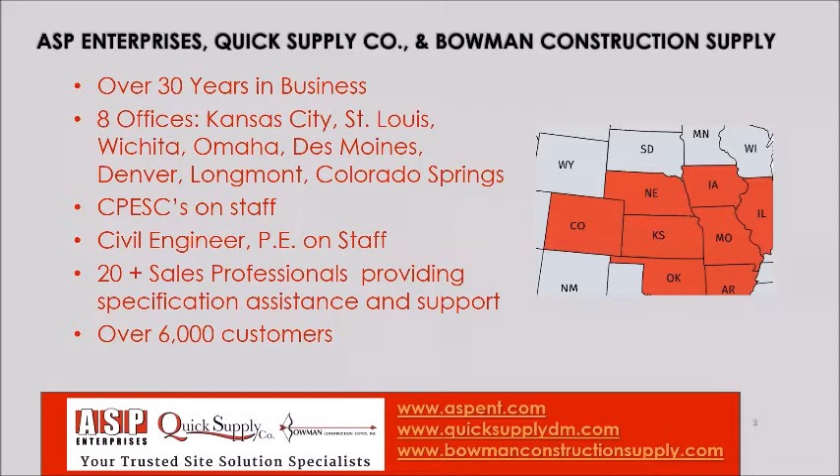And well over 6,000 customers in the region, so we've been around a while. Many of you are familiar with us. Those website links you'll see again - those are great technical resources for you. And probably the most important thing I want to impress upon you is that you can specify with confidence that we have the servicing ability to take care of those projects.

And again, the website - we have some of the best brands in our industry, and all those brands are represented with both specification sheets and installation guides. So our website can be a huge resource for you. They're also mobile friendly, so wanted to make sure we get that out of the way.

Four years before the 2017 card, the 2013 card was issued. And I don't like to read to people. If you can see on your screen, you'll be able to read these different categories that ASCE measures our infrastructure. There's 16 different groups that get letter grades, and those are just used as indications to try to identify priorities and to find out where we have the areas of greatest need.

Anything I show on here is not an indictment of civil engineers or anybody else in the construction industry. It's just to identify the problem and then figure out the solution.

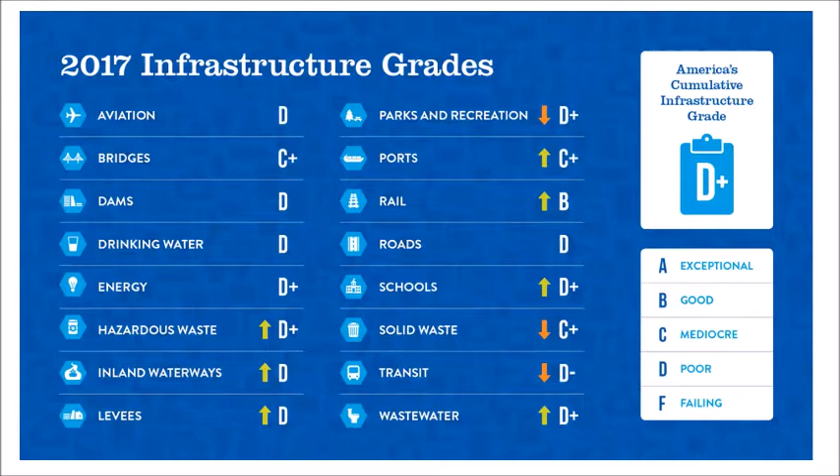One of the things we've learned with this report card is they continue to compare results from one report to the next to see if things are getting better. You'll see no arrow in front of roads. That means the letter grade didn't change from 2013 to 2017. Didn't go up, didn't go down. A D is still a D.

And that's not an indictment of us. It's not a criticism of us in the profession. It's just a fact that many, many Americans drive cars every day, and we all know that. So our existing infrastructure is aging, and ongoing repairs just can't keep up with demand yet.

Now, with something like what we're experiencing now, there's a lot fewer cars on the road, but this is temporary. We all know what it's going to look like when we get the all clear and this thing clears up. There's going to be a lot of people back on the road, and we hope to come see you all again. But in order to get ahead of this challenge we have to get that letter grade up, we're going to have to really identify what types of things we can do better.

And that's what we're doing now, is sharing information, sharing knowledge. When we do a full hour just on roads, with a room full of engineers or contractors or government agency folks, we can get specific about what cracking is, or which failures you're seeing in your area, whether it be cracking, rutting, or raveling.

The fact is, we all see some version of these in one place or another. Certain regions, based on climate, soil conditions, traffic patterns, and just old practices of design and construction of roadways, see some of the cracking more than others.

In the old days of asphalt, flexible pavement, rutting was a real problem, due to warmer temperatures and soft mixes. So to compensate for that, the industry overcompensated and went to much stiffer mixes. So rather than rutting being the leading problem in a lot of areas, cracking became the problem as the pendulum swung towards stiffer mixes. So asphalt binder is being asked to do more than it can really do.

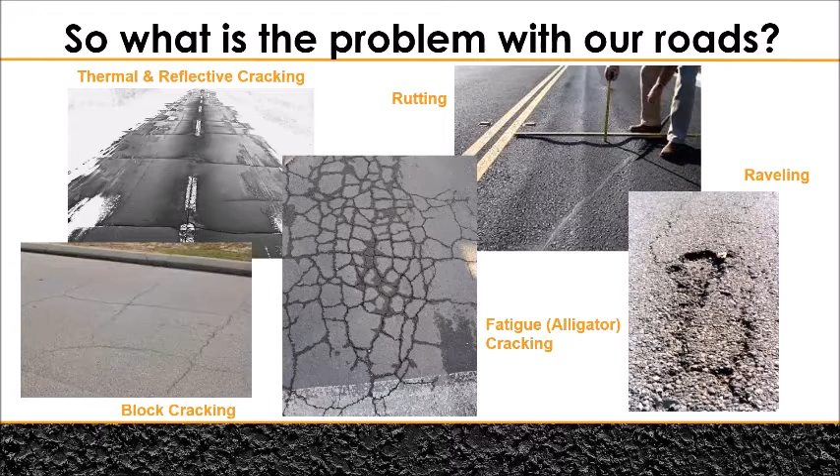It's being asked to prevent rutting and prevent cracking all at the same time. And what we've seen is no matter how good the design is, or how good the mix is, or how good the base is, eventually all roads are going to crack.

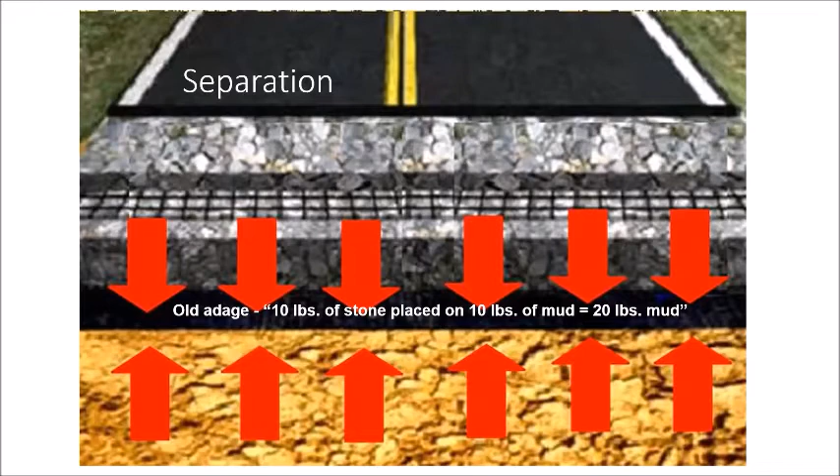There's another graphic I just popped up to overlay this one on purpose, to not totally cover it. But what happened when TenCate came out with this miracle solution, as they called it, the RS580i, is it was able to provide the strength they needed from geogrids, plus the separation that geogrids alone cannot provide. And why does that matter? We're going to get into that in a little bit.

One of the things our supplier, TenCate Mirafi, talks about with their RSI series is that you can reduce the amount of rock you need for your rock base. That is true. The other option is to go ahead and use the rock base you were going to use, but now that you've added the RSI, you get a lot more strength and a lot more life out of that pavement, going towards perpetual pavement.

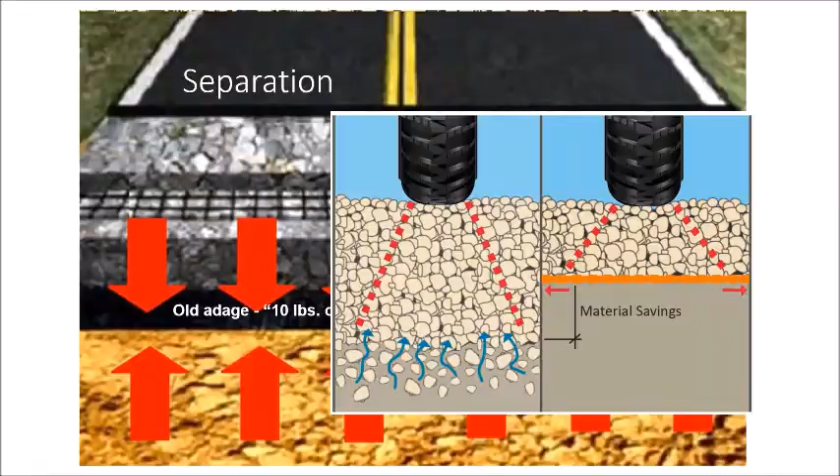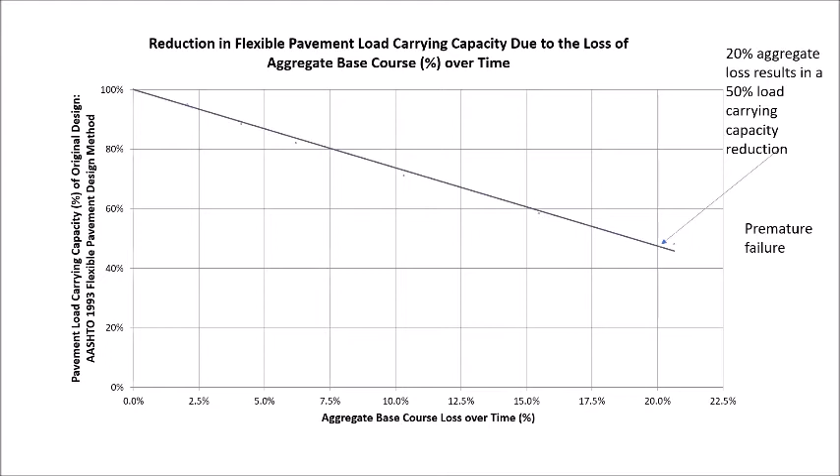I can give you all the research that shows that just losing 20% of your aggregate, which is the mud coming up into the rock or the rock going down into the mud, can cause you to lose 50% of your strength, or load carrying capacity. Think about that for a minute. 20% could be just a few inches depending on the thickness of your rock base, and now you've lost 50% of the strength that's supposed to support that road. You're going to get premature failure.

RSI brags about 5 different categories for their product: higher modulus, higher strength, higher water flow filtration, better confinement similar to what geogrids do, and better separation, which we just talked about.

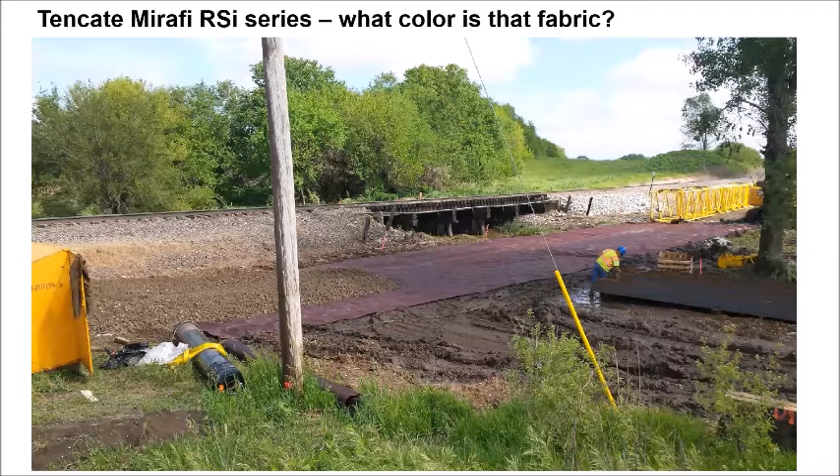If a specifier calls out an RSI product on their plans, they want to defend their spec. They want to make sure if they drive by, they see the right product on the ground. If it's a black geotextile fabric, all those other geotextile fabrics look the same - you really can't tell the difference. So you want to be careful to defend your spec because all geotextiles are not created equal. They perform differently, they have different characteristics, and we're going to get into that in this next slide.

This is just a real simple graphic. There's a lot of other products that were tested by independent labs. This one happens to be in Louisiana. A lot of testing was done in Alaska. There's been a number of universities that have tested these products and compared them with each other in scientific tests, so they came up with scientific data.

And in this, it's showing the pre-rut deformation. That is when the base doesn't rebound and keeps a permanent deformation in the base, and that's going to expect the pavement to carry that load. Flexible pavements aren't going to carry that load - they're going to follow the base. So GeoGrid can provide good confinement and reinforcement, but it can't provide that separation.

So what tends to happen with a GeoGrid alone is you can get contamination of the aggregate base with the soil fines. So eventually you start to accumulate deformation in the base. This says 15 millimeters - that's going to be over a half an inch. That's going to end up being cracking in the flexible pavement above it in asphalt.

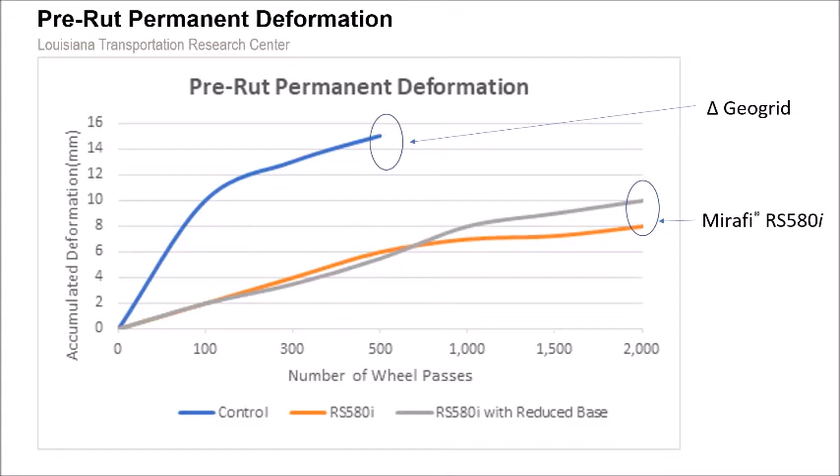Mirafi RS580i shows half of the deformation under the same number of wheel passes, and it continues to get stronger quicker. That's a stress-strain relationship, meaning it doesn't have to stretch before it gets strong, not like the other products on the market. So the Mirafi RSi series is definitely different than everything else.

This happens to be a really cool picture that maybe was photoshopped a little bit to show how orange it is. But we've had highway projects and railway projects that have used huge quantities of RSI, and the specifier can drive by, see the orange, and make sure that they're putting down the geotextile they've specified.

Now, I'm talking about adding the strength and longevity and keeping that aggregate clean as you do with RSI. It leads us to the biggest problem that engineers and anybody has with roadways. And just like real estate, you're supposed to ask people what are the 3 biggest concerns with pavement: drainage, drainage, drainage. Now, RSI is strong and it's great for soft soils, but it alone isn't a drainage solution by itself.

And drainage matters because you're going to get potholes, you're going to have hydroplaning cars - it's a safety issue. And it really does show up with somebody who has old tires, like my kids. They live on a gravel road and they drive old cars. Safety is an issue. Mirafi used their RSi product, which is super strong.

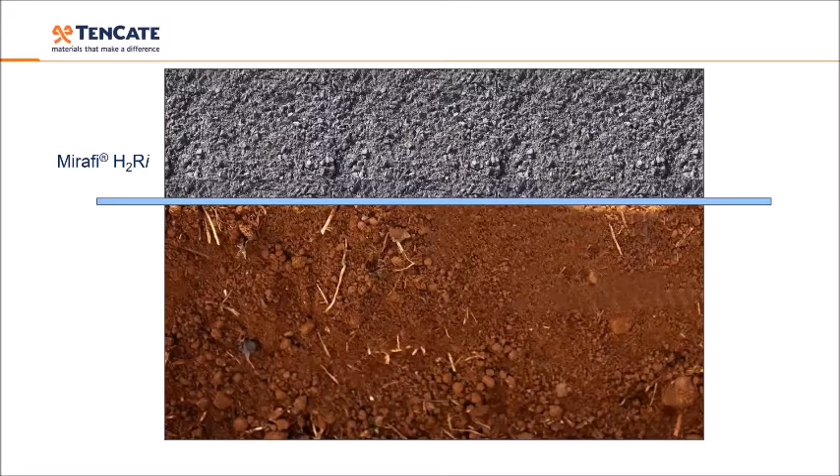This product here creates a capillary break and a drainage layer. So any of the excess moisture in the base is going to come up and hit the Mirafi H2Ri, which is, like I said, as strong as RSI, but it has these little channels in there that actually wick away moisture, similar to an active fitness shirt.

I can't say brand names.

What that does is it works like a siphon, rather than work like a drainage layer that operates only due to gravity, which would be out of luck if there was no slope or fall, or out of luck if there was a wrinkle or a fold in that rolled product. H2RI can go up and over any wrinkle or fold or deformation in the base.

The plan view of this, which I should include and I took it out, shows this as a hump up and over. The way I narrate it is I grew up in southern Iowa, a poor kid living in the country, and we used to siphon gas out of old trucks and tractors to put into a dirt bike. Once you suck on the hose and get that gas started, it just continues to flow into your container below. I hate to encourage you to siphon gas, especially in tough economic times.

Gas is cheap, so don't do it. I'm just saying this works like a siphon, and this is fantastic because in the past, this was a concern that all designers had. If they had a drainage layer, they had to make sure it was installed perfectly — there can't be any wrinkles or folds, or it wouldn't drain.

This is a graphic that just shows the comparison of different products and how they work in draining the soil, and increase in undrained shear strength of fine grained soils. Well, the difference here is the percentage of the moisture content. On the far left is this red line, which should be blue — I'll edit this graphic someday. It shows H2RI and what happened to the moisture content compared to some of the other drainage composites and other products that were intended to solve wet soils.

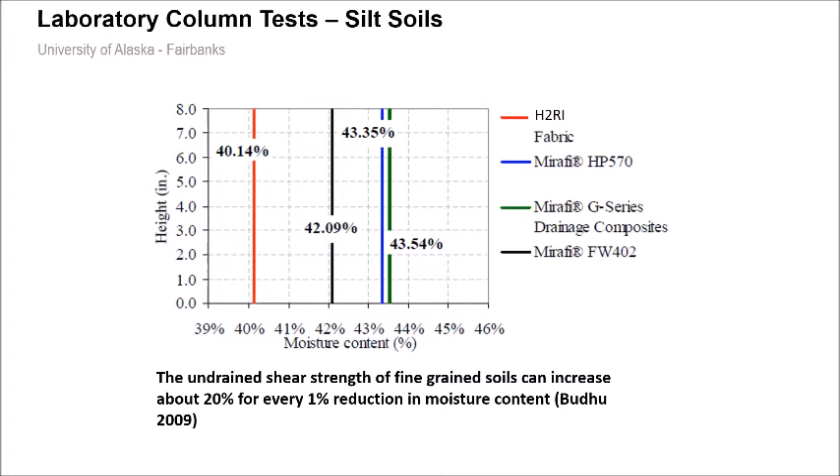This is a significant increase in optimizing the moisture content. There's a lot of research that says the reason that matters is for every 1% reduction in moisture content, you gain 20% of the strength of that soil. Or the other way of saying it, for every 1% that you optimize the moisture content, you effectively increase the soil strength. Now we're creating a stronger base.

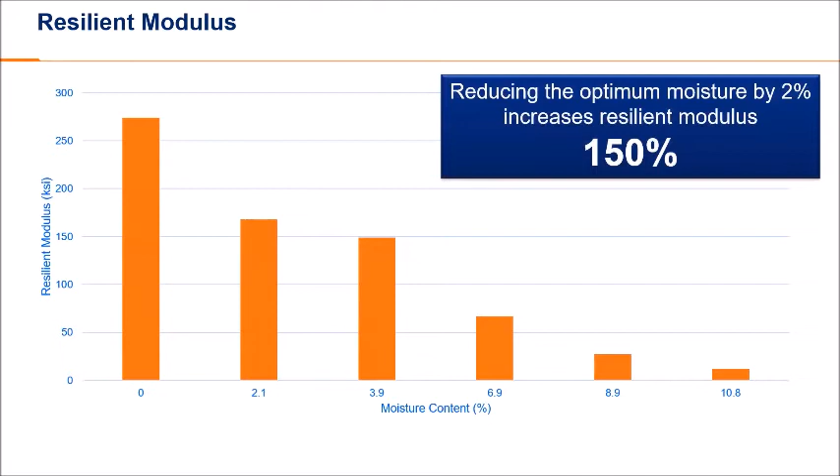The research shows that just by changing it by 2%, you can increase the resilient modulus, which is going to make your road stronger and last longer, by 150%. So a little bit of investment up front in putting down a better base now can lead to a much better road section. This is like building a cake — everything sits on top of the sub base, then the base, then the pavement. So another way to say it is if you reduce the optimum moisture by 2%, it decreases the pavement deformation by more than 50%.

There's already, MoDOT has used it on some bridge approaches. A lot of organizations that we deal with on a regular basis have already started using it for their wettest areas. They might use RSI on the rest of the roadway, but on a really wet section, they could use H2RI.

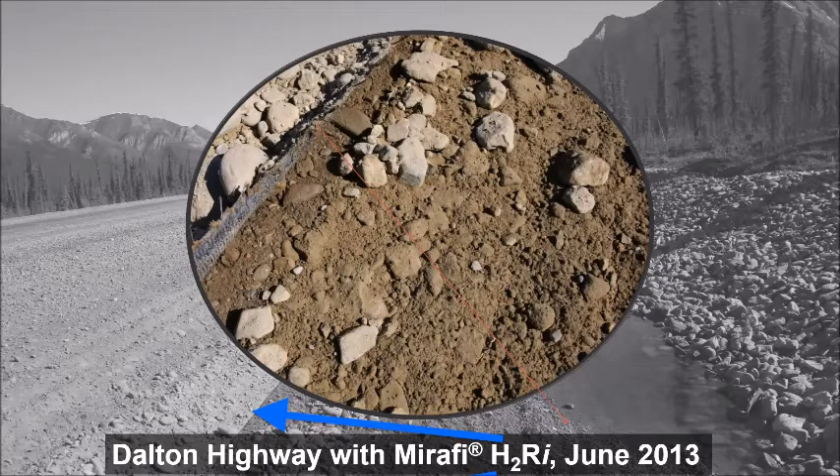I've talked to a friend of mine who works for a big engineering firm here that does a lot of design for the DOT, and he would talk about rolling that down to a lateral drainage tile. Instead of exposing it, have a lateral drainage tile running the length of the roadway. That's another option.

So if we've improved our base and made it last longer, and achieved what we want to call perpetual aggregate base, now if we're going to do the next layer in the cake, we're going to have to go with the pavement above it.

Before I hand this over, I want to reiterate something. There's only so much budget to fix these roads. This isn't an indictment on any of us that we're getting a D on our roads. The fact is we have to take that limited budget and figure out how to spend it.

In a perfect world, we would entirely replace a road, and the best way to solve drainage would be to get down there and regrade the ditches, put in new culverts that are properly sized, use only good material for the sub base, then build up a really good aggregate base, and then put on the best pavement.

Fact is, a lot of communities are faced with having to do just an overlay. And sometimes they roll the dice and do an overlay on a road section that maybe needed to be replaced more than just an overlay, and they just bought themselves some time. The next solution we're going to talk about is going to touch on that a little bit.

But I really want you to know there's a happy medium somewhere in there. You can leave the base, the sub base in place. You can get down and replace part of your aggregate base. And if you use a product like RSI or H2RI, you can get longer life out of that. So a small investment up front can give you a significant increase in the life of that pavement at the end.

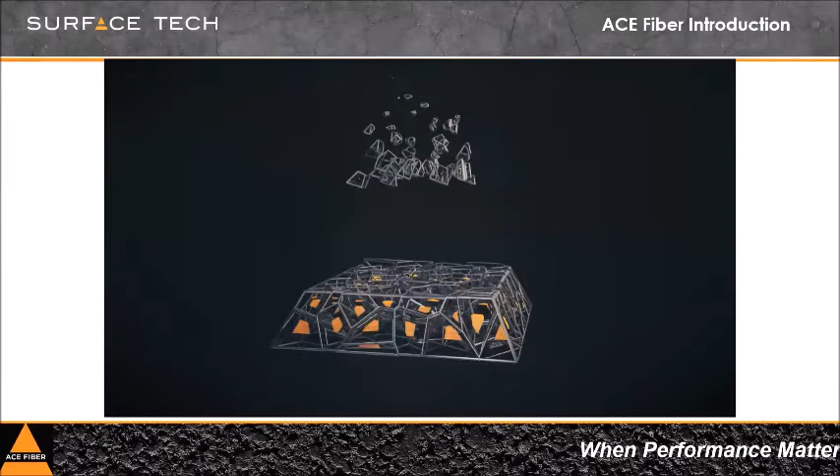Well, a great video, so my part is over.

So let's get into the ACE Fiber part. For those of you not familiar with ACE Fiber, it's a mixture of 2.1 ounces of fiber and 2.1 ounces of wax. We have bundles that are 3/4 inch and 1.5 inches long. You get approximately 10,000 fibers per bundle and about 19 million fibers per ton of asphalt. You can see in the center picture the coated fiber. At 170 degrees it starts to melt, and at 190 it's totally soluble in the mix.

Now, sasobit has been used for years in warm mix. There's not enough sasobit wax to actually change the mix design. You don't have to change any of the binder. So it's a nice chemical, a nice compound to be able to add into the mix, but you're not adding any chemicals or plastics that could do any harm to the mix.

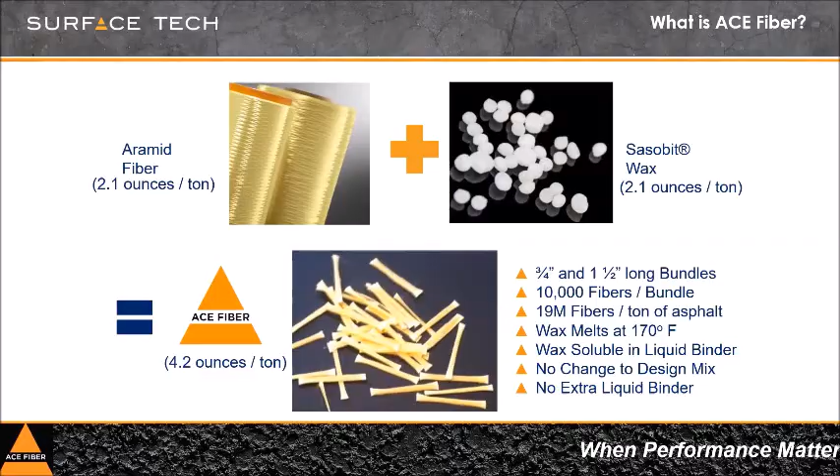Now, the reason we use Aramid is it's 5 times stronger than steel. On the left-hand side of the chart, we have a breakdown at 932 degrees Fahrenheit. Hot mix is running at about 400 degrees, so if you've got mix that's 900, it means your plant's on fire, so you've got some other issues.

The other reason we're using it is it has high strength at low strain, meaning it doesn't need to be pulled like a geogrid for it to achieve its strength. Other fibers have been used—the cellulose fiber is a very common one.

Just to show a little change, cellulose fiber is a fiber that's used for absorption. You're using it for curb mix, for mixes that have to travel a long way. It's holding oil, so you can increase your oil content and get mix that doesn't stiffen over time. Aramid is not that type of fiber, so there's a lot of misconception about the two.

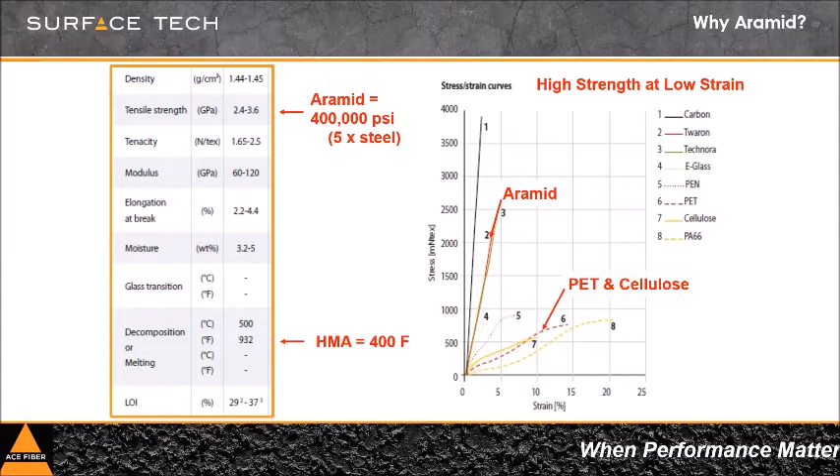Aramid is actually a fiber that's going to include strength. It's going to add cracking and rutting resistance. So there's a difference between the fibers that people use, and this is a newer fiber being used in hot mix.

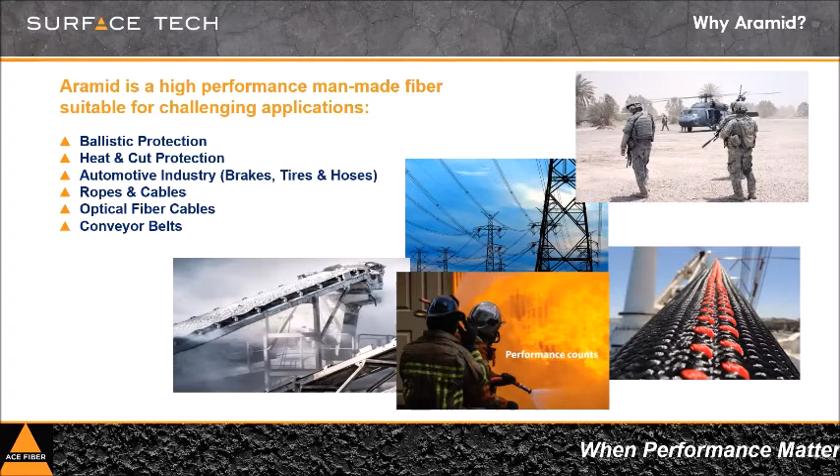So what is the actual Aramid? Aramid is a manufactured fiber used for ballistic protection, for fire, police, military. You're replacing high strength steel with a lightweight Aramid. Aramid also goes by the name of Kevlar—Aramid is the actual fiber that makes up Kevlar.

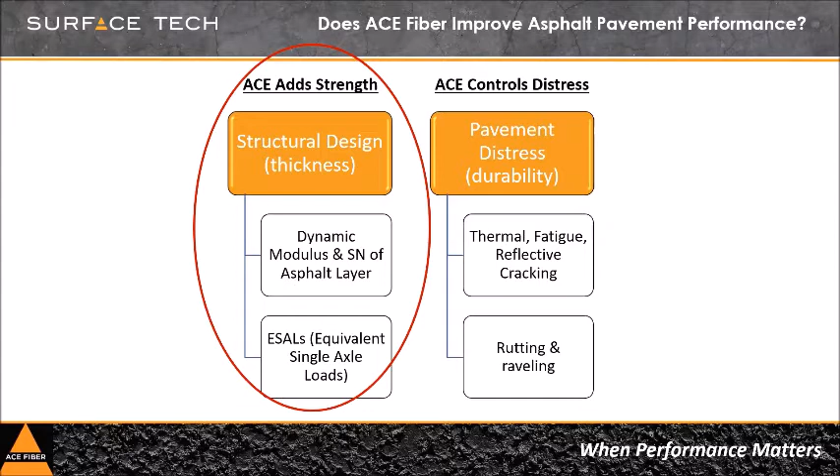So we're going to talk about a few things today about what fiber does. We're going to talk about adding strength, which we'll get into in a second, and later we'll talk about how it controls the distresses—it's going to help with cracking and rutting. So anything we talk about today goes back to the core values of ACE fiber: strength, and cracking and rutting resistance. That might be on a quiz later, just to let you know.

So Bill talked about the aggregate base, and he talked about the RSi product. Now we're going to get into the actual design of the pavement, and strength, rutting, and cracking resistance.

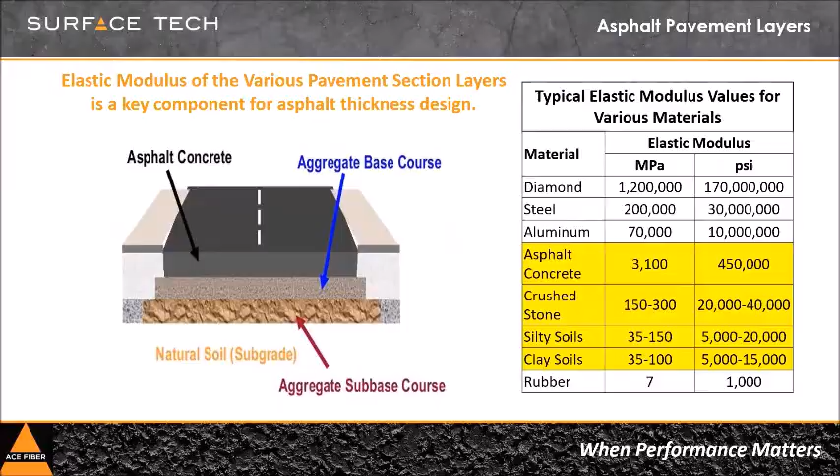So here's a test—there's lots of tests that the asphalt industry uses to go over strength. It goes over rutting, goes over cracking. There's a wide variety of tests. We're just going to go over a couple today. We could talk about them all day, but we're just going to go over a few.

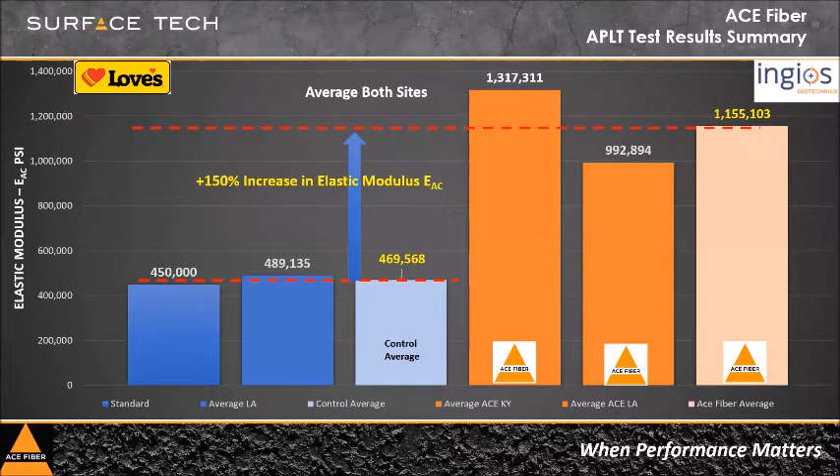So this is the automated plate load test that we'll use today. We'll just talk about it for a little bit regarding strength. As you can see here, on the left-hand side is a control section without fiber. On the right-hand side for these next couple charts, it'll have a fiber section. So on this one, you see a 150% increase in elastic modulus.

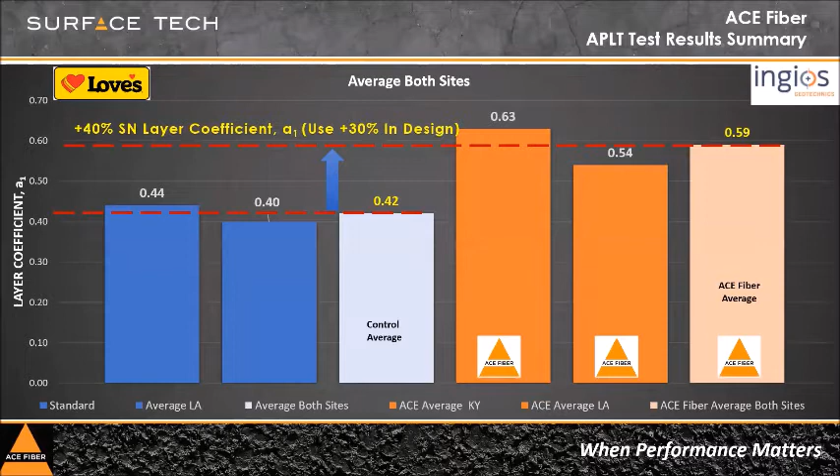This next one, all these projects are done at a Love's Travel Center. We have a national account with Love's for all new asphalt that they use. They're still using concrete around the pumps, but all the asphalt on their whole parking surfaces is asphalt filled with fiber now. So you can see a 40% increase in the layer coefficient and a 328% increase in your ESAL count.

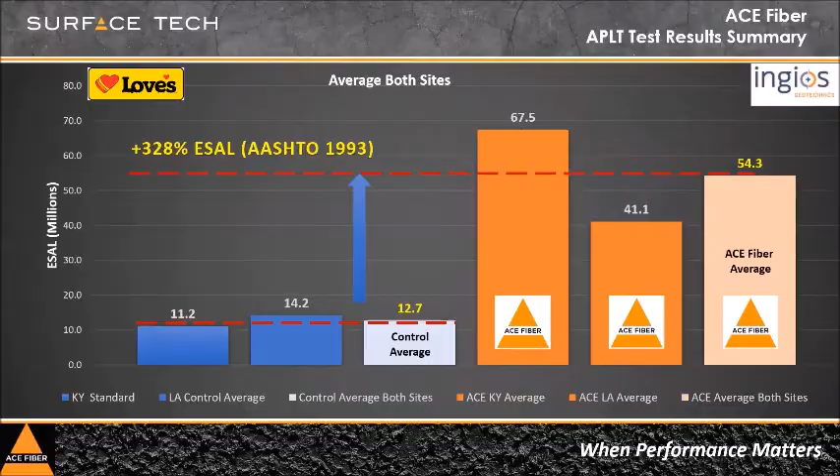So you can see there on the left-hand side, we're talking about adding strength. We have 150, 40, and anywhere from 100 to 500% increase in ESALs.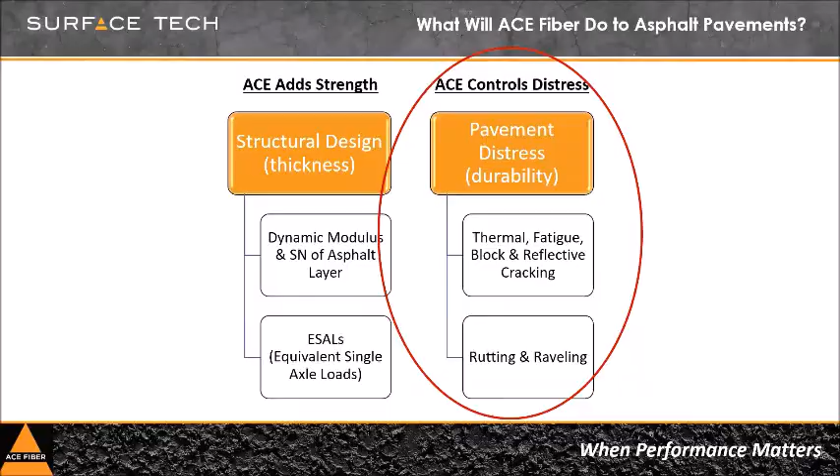So now we're going to switch sides. We talked about the strength. Now we're going to talk about controlling distresses - how it helps with rutting, how it helps with cracking. So this is a simple PG chart.

Everybody's using about a 64-22, at least here in St. Louis. Some areas you go higher, some areas you go lower. But when you add fiber to your mix, your 64-22 is going to perform like a 70-28 or a 76-28.

Now you can change your binder, you can put polymers in it, but no matter what you do, you're never going to have a product like this that helps with strength and adds rutting and cracking resistance. No matter what polymers you're putting in, no matter what you're changing, you're not going to get anything unless you put fiber in.

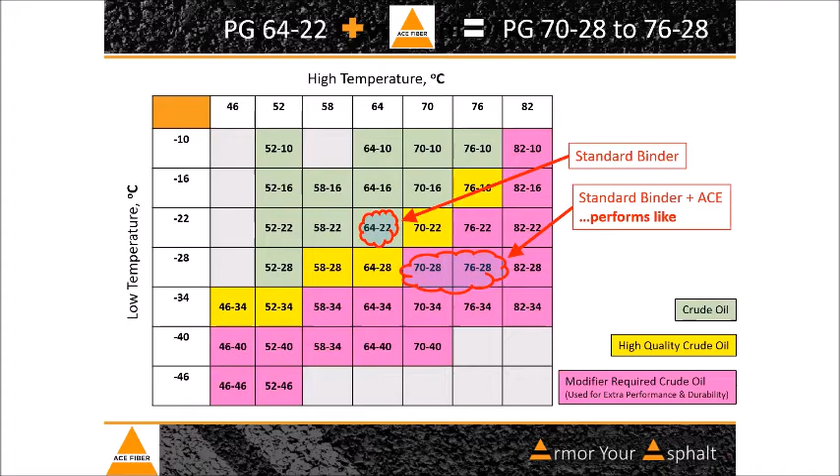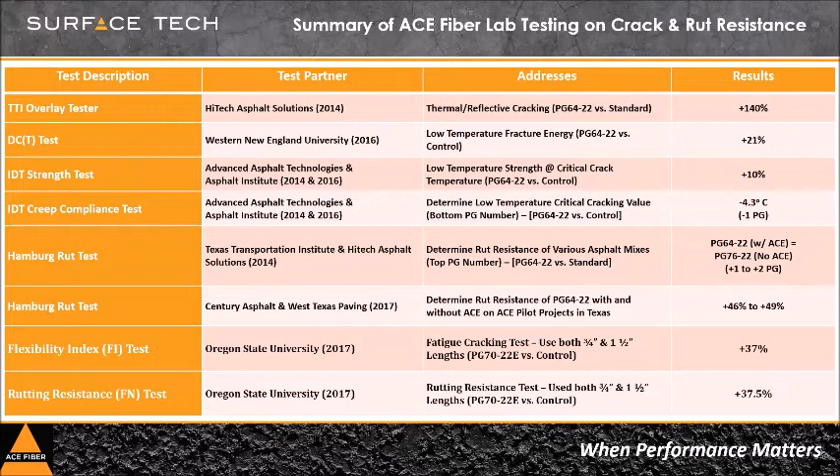So here's a number of tests that we have - this is a chart of 8. I think we're now up to 14 different tests showing the increases and the added benefit of fiber. We have all this information we can make available to you. We will give another presentation if we're all under quarantine still, or we can come into your office and do a lunch and learn, or just send you an email with all of our testing. We have a number of tests out there - it would take all day to go through them, but we have those available for you.

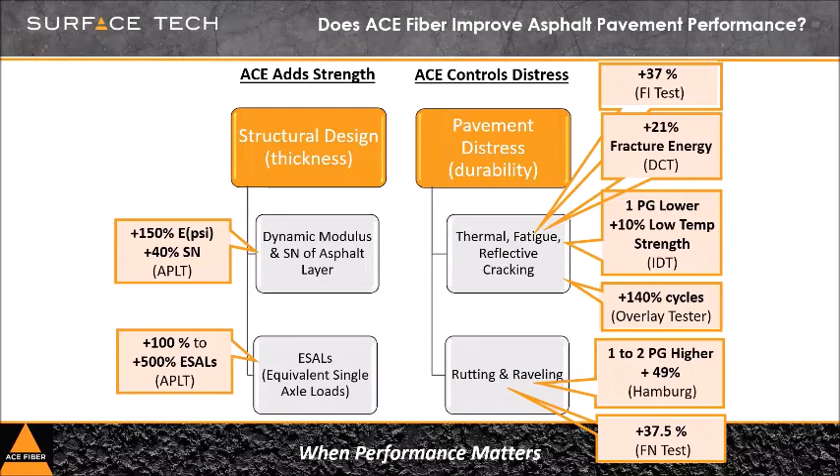So kind of going back, showing all the increases, the added benefits of fiber in all of your mixes. You can see there all the added benefits of using fiber. Now here's where we'll break it up a little bit.

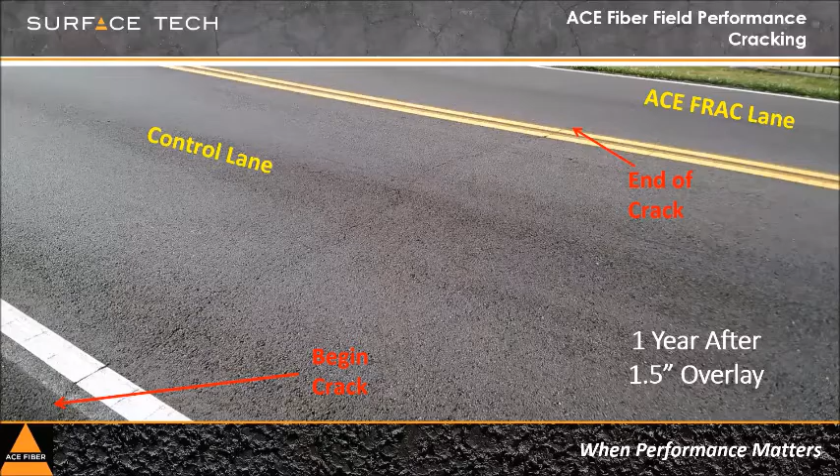This is an overlay test section that was done before the 1.5-inch overlay. You still have to go through and do all your crack filling - you're not changing that, but you can see the crack going all the way across the road. Once they did the 1.5-inch overlay, you have your control lane here on the near side of the screen. You can see your crack begins right on the shoulder and goes all the way to the center line. Right there, you can see it coming and stopping right where the ACE section begins.

Now, after 1 year, we came back, we looked at it. We had 13 cracks return on the control side, and only 1 came back on the ACE side, and that was up against the bridge. So you're taking a flexible pavement and you're putting it up against a rigid surface where you're going to have cracks and you're going to have issues with your road anyway.

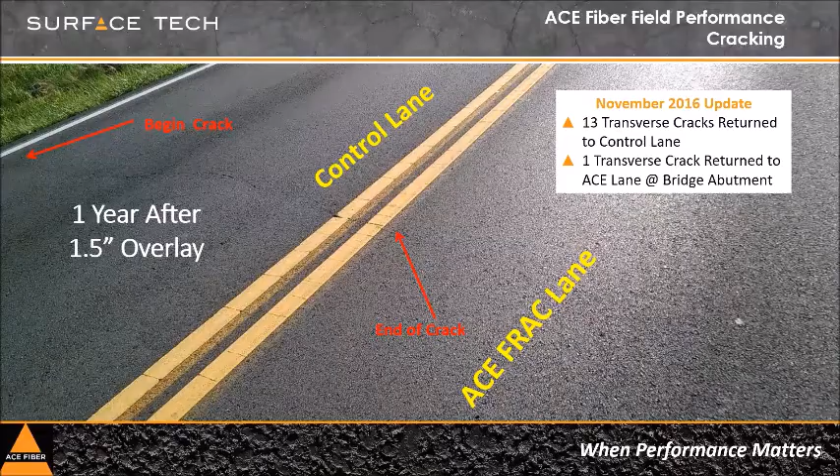So we'll go through just 2 of the tests that are widely accepted. We'll go through the IDEAL-CT and the Hamburg rut test. So both of these are helping towards your balanced mix design.

So the first one we'll go through is the IDEAL-CT. This is becoming more widely accepted from state to state. It is a repeatable index test. Most asphalt labs on site or independent labs have this machine. It's a repeatable test - you can do it throughout the course of the day. You can take samples, you can be testing your cracking. One of the big things about this is that it's an inexpensive test. It's one that can be done on site. A lot of asphalt plants have this test in place and are able to use it throughout their asphalt design.

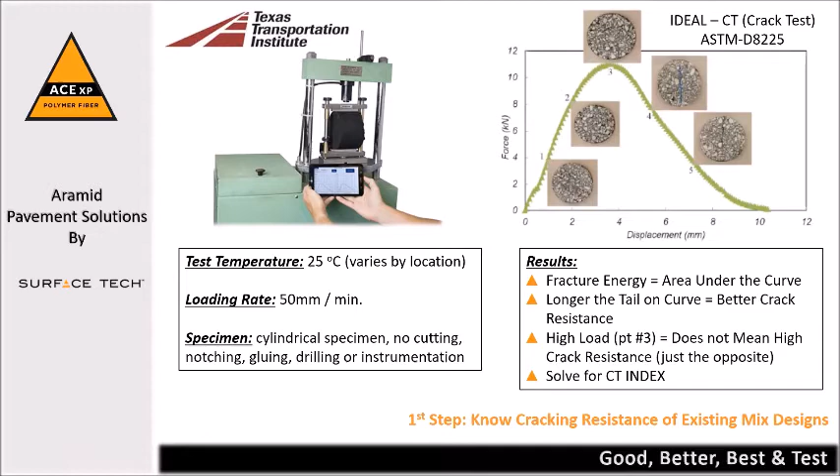Next we'll go through the Hamburg test. I've been quarantined for a week, so a hamburger sounds really good, so we'll call it that today.

But it's a water bath test. They take little pucks, run a simulated wheel over it, and then you check your rut depth.

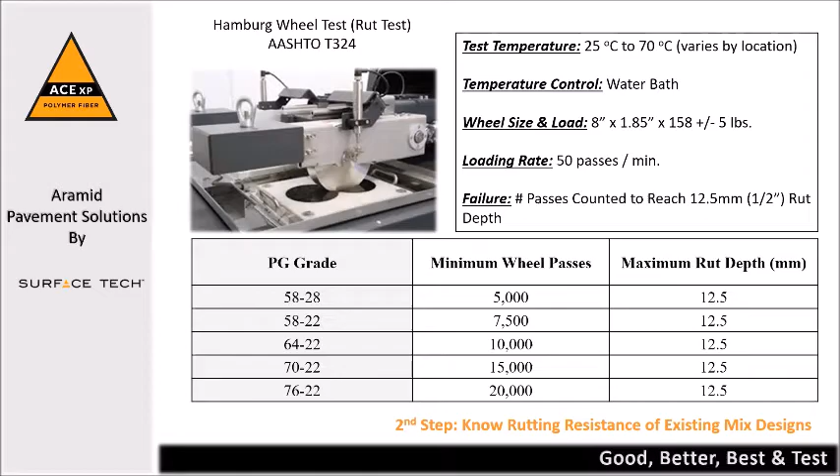On the ideal project we tested, you see the control side without ACE, then your single dose and double dose. A single dose of ACE fiber is what we typically recommend for every road, for every overlay, for whatever depth you're doing.

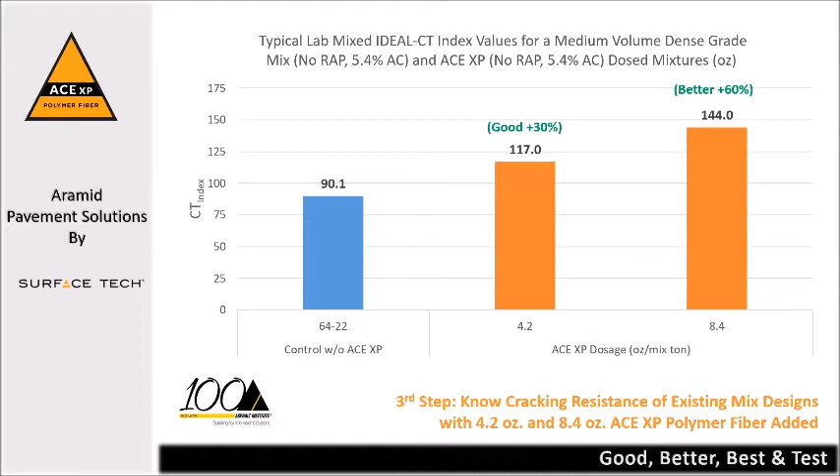Not every road is the same. As Bill talked about the subgrade, you're looking at all different roads that can have a disaster of problems, like concrete overlays. A single dose is not going to be your answer every single time, and ACE fiber is not going to be your answer every single time. Sometimes full depth reclamation or a completely new road is the answer, but we have other options - a good, better, best. We can do testing on the road to know what our best option is going to be.

With all these tests and added benefits, you're really achieving a balanced mix design - added cracking resistance, added rut resistance, and added strength.

Now, how do you get it in? Here's my specialty. I swore I'd never go back into asphalt, and here I am.

On the left-hand side, you see a drum plant, and on the right-hand side, a batch plant. We have a machine that comes in, or a line vac like they talked about in the video. We back our machine in, set it up, get it plumbed in - all we need is air and a little bit of power. We run a hose up to the RAP collar at the drum plant, set our plant rate, and the machine runs, dosing out the 4.2 ounces.

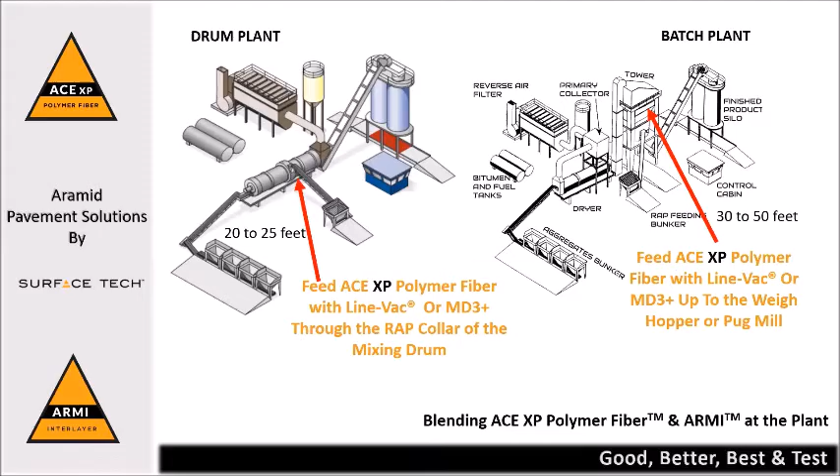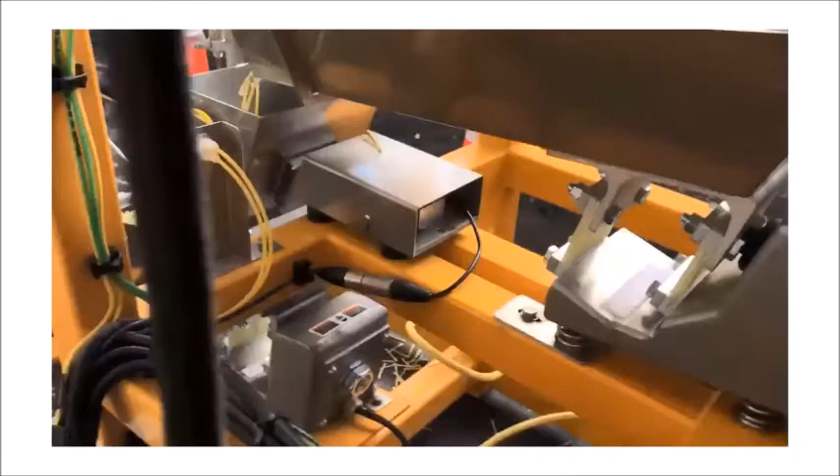Here's a video of our machine, the MD3. We have all the fiber in the hopper, going down into the pans. Our sensors meter it out, dosing 4.2 ounces and dropping it in. There's our line vac - it goes through our 2-inch hose all the way up, with our tech at the top making sure it's coming out the other end, going right into the weigh hopper and getting introduced into the mix.

Once it's up there at that 170, 190 degrees, the wax is totally melted off, and those little sticks blow apart like dandelions.

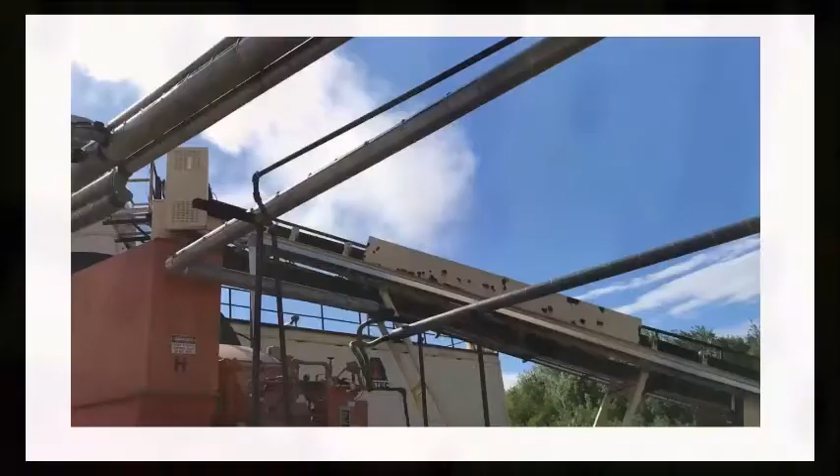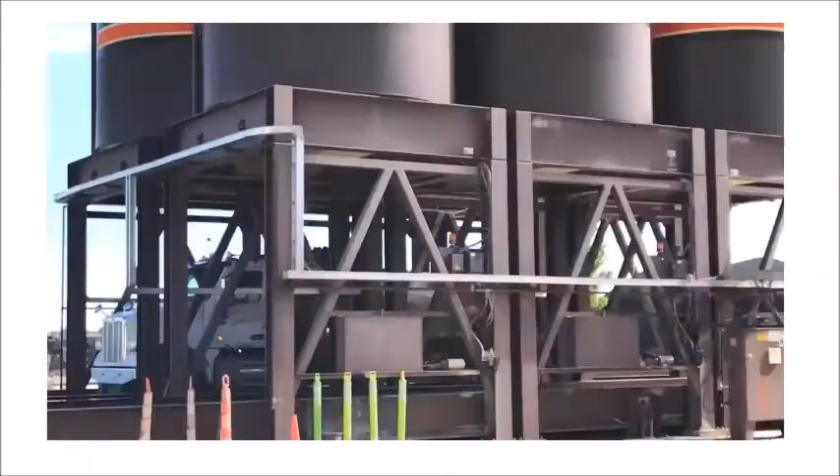In this one, you can see our drum - it's already been introduced into the mix, it's been made, and it's getting up into the silo, down through the silo, and into the truck. So you can see the whole process of asphalt being made with fiber.

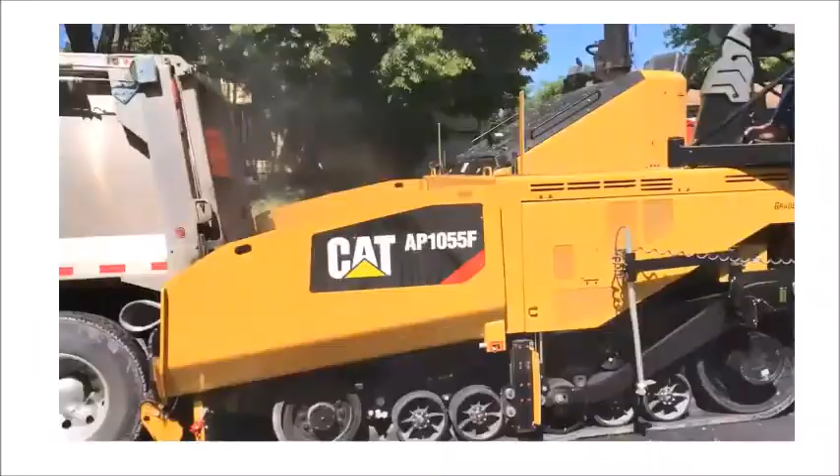Then on the job, the crews don't even notice the difference with the mix - they just see it going in, with no fiber sticking out. We have our people on site checking everything out.

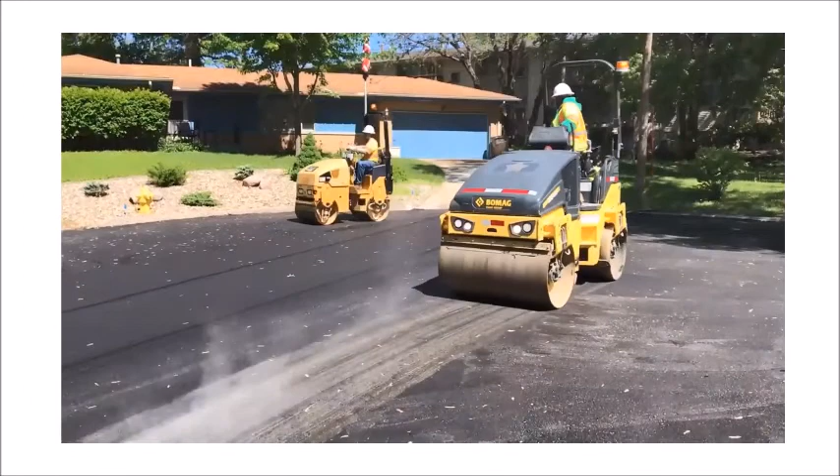And then here you go in place. Now, one thing all the roller operators have said is they achieve compaction in fewer passes with the fiber in the mix than without. So it's less labor time for the rollers, and that roadway is opening up that much sooner.

And then finally, you can see some fiber in the mix. That's the way you're going to see it—on the end of rakes, on the end of shovels. You can pick up some clumps of it and see the fiber, but it doesn't stick out. It's not changing the color of the road.

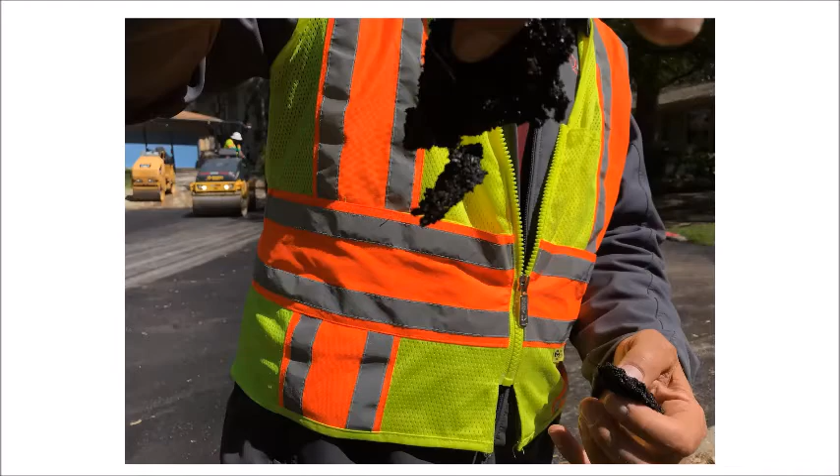But we've been able to show you today from start to finish, going through our machine into the plant, into the trucks, and then ultimately to the crews, that there's no change in the mix or the mix design, but you're able to see that increased life and longevity of the mix. So with that, I'll hand it back to Bill.

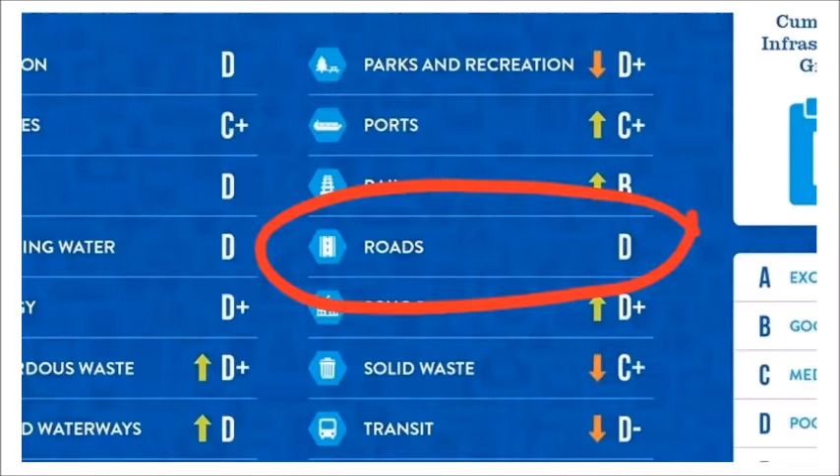Bill? Yeah, that's great. I had somebody coming in here, a truck driver, wanting me to help him unload a truck. So sorry, everybody, this is the real world. We really are working, we're open and ready for business. So sorry about that—nice guy, I wish I could have helped him.

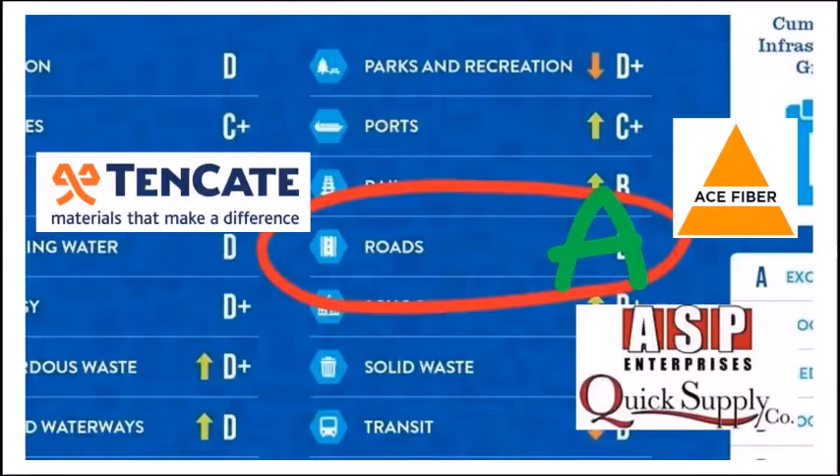Thank you, Alexi. Don, you jumped right to this slide. That's okay, or did I do that? Let's go back, we're getting ahead here. Where are we at? Yeah, let's go back a couple slides, I was going to wrap something up here.

Sorry guys, one of the things I want to make sure I didn't gloss over in talking about RS580i and H2RI is that H2RI was specifically invented just to make sure they're draining off those really, really wet areas.

I had said that I know of a couple projects with H2RI in Missouri, and I went and checked those while Alexi was giving his presentation. And before I was asked to unload this truck, I went and looked at our case studies. Jeff Chambers asked a question through the Q&A, and I answered it in a way you should all be able to see. But this is our first Zoom webinar, so if not, I'll go ahead and ask and answer it since we're doing great on time, thanks to Don and Alexi keeping us going.

He asked which projects MoDOT used H2RI on, and one in particular is the Boone Bridge, down in St. Louis County. If this is the Jeff Chambers from MoDOT, he should be in that same area, so he won't have to go very far. He can sneak out of his quarantine and drive by and look at the project, but he's not going to see the product. H2RI is going to be buried, and the only thing he's going to know is if that base is holding up well because it's being properly drained with H2RI.

The other projects I specifically thought of were a public library and a bridge in St. Joe, and several others that used the RS580i, and I can share those case studies as well.

If you imagine a construction site that's graded out and they're getting ready to start compacting the layers of the sub base, and it's wet or soft, and you've seen some of those projects where equipment gets stuck in the mud—that's where this solution comes in.

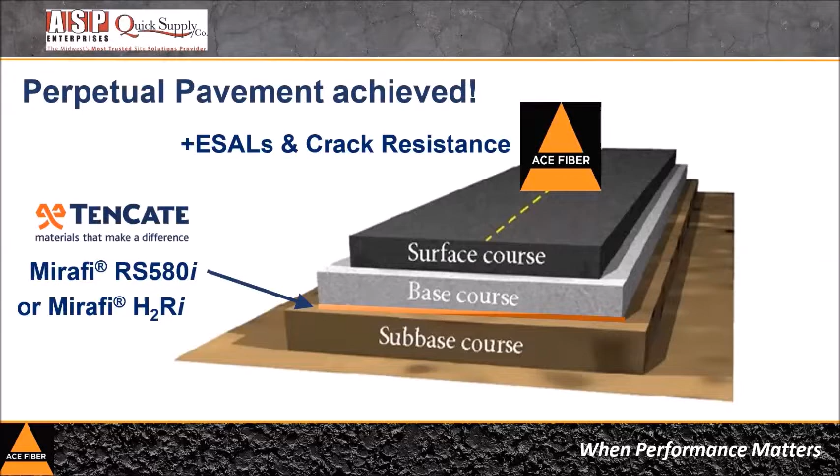So it's been really revolutionary. It's just been in recent years that we've done a good push here in the Midwest, all the way over to Colorado, to get people to understand the value of it here, even if they don't have the permafrost they have in Alaska.

Now I'll advance the slide, and it was talking about that report card. Let's bring it back to the beginning. Is it too much to ask that we shoot for an A? And if we come up short, like I so often did in college, at least we did better than a D, like I usually did.

If we work together and you contact us as your solutions provider, we're more than just somebody with a big warehouse that delivers material and drops it off. Some of those big box stores, for you home improvement fans, you have to know what you're doing yourself. Whereas if you remember some of the mom and pop shops, and some of my friends who work at big box stores are still good at this, they provide a level of service that says, I want to make sure you understand your problem at home and what you're trying to fix.

We want to make sure you understand your problem on your construction site and what you're trying to fix. We can help on the design side of that, and stay tuned, we can help through the pre-con with any of your chosen contractors. We help those contractors, if it's something new to them, make sure they understand the proper installation.

So they're defending your spec all the way through to whoever owns this and how they have to maintain it, whatever that solution is. As we get into our other series, in 2 weeks Don's going to tee this up, we'll be doing low impact development and green infrastructure. I hope if you're not in that business, you'll share that word with somebody else, because we're going to continue to walk alongside you as your partners in your profession. It doesn't cost you anything to have this engineer help your engineer, or if you are an engineer, to give you my advice. We're going to be your project partners all the way through from beginning to end.

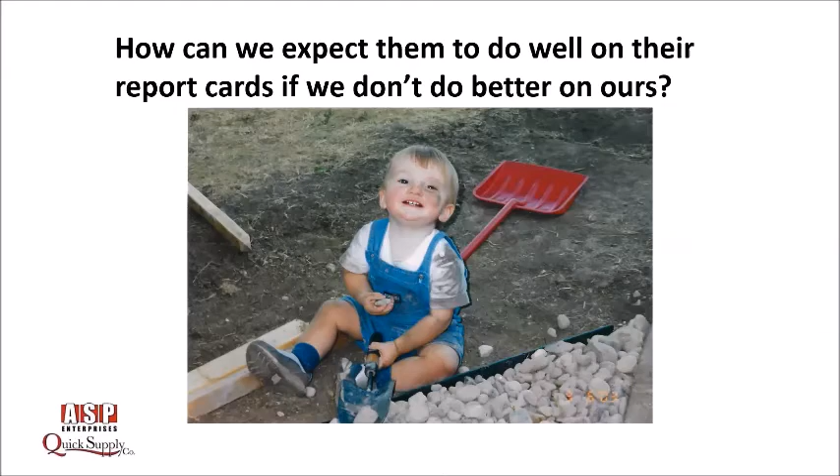And I think you're going to win something out of this. When this all frees up and clears up, I think somebody ought to buy you a sandwich.

If you can't accept a sandwich because you work for the DOT, we'll buy one, and we'll sit there and watch you eat yours. So thank you for that question.

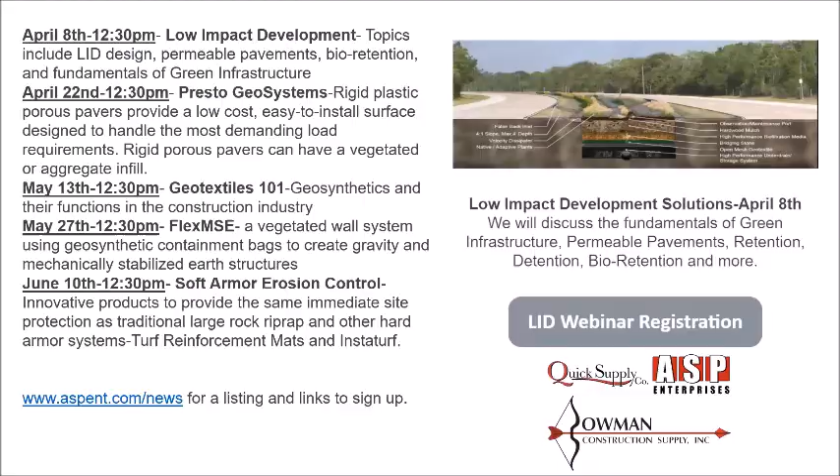And finally, we thank you for your time. Bill, do you have anything for closing? I just want to say thanks to everybody for doing this. I know it's a difficult time for all of us. I love that we can stay connected like this. I hope you all stay safe, and I'm really looking forward to seeing most of you, if not all of you, in person someday soon.

Reach out to us, we'd love to hear from you. Thank you, good job, Donna. Alexa, do you have anything? The same goes for me - I appreciate everybody taking the time. I know it's kind of hectic right now, but let us know if we can jump back on and give another presentation, or if there's somebody that wasn't on today that you might know who would like to hear us, let us know. Thank you.